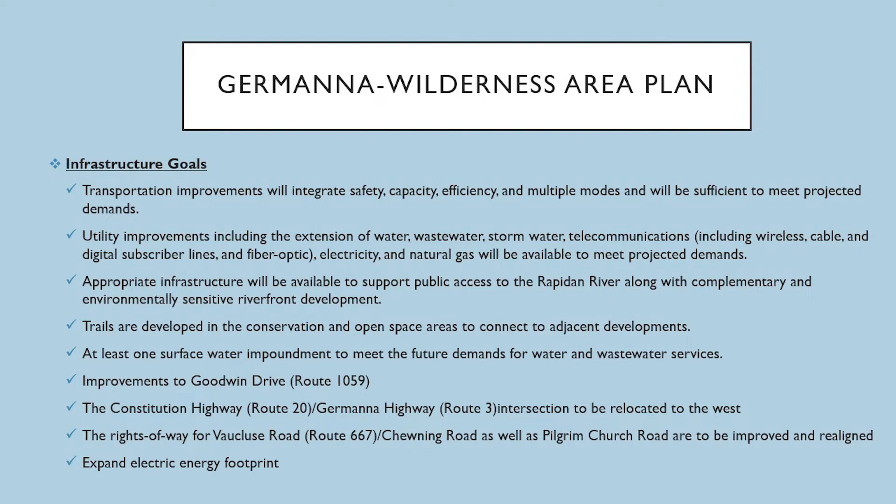So, as I noted, what's tied to the hip of the GWAP is your planned development mixed-use zoning district. Again, it incorporates a GWAP. It allows mixed use of interrelated and compatible commercial, institutional, residential, and recreational uses in a pedestrian-oriented neighborhood, providing a level of density and intensity in order to promote a dynamic and convenient neighborhood. Again, the town centers will be important to that.

But then you also have your traditional type of development with the larger estate lots and single-family units, and some townhouses, exemplifying the traditional communities that are pedestrian-oriented. You're going to see we're going to have access for pedestrians off-site to come on-site. We want you to come on-site, spend money, come into the town center, eat, and shop at our restaurants and retail stores. And then we're going to have bike mobility, and in the future we hope to have public transportation within the project as well.

We're also going to be incorporating, preserving and protecting natural sites and features. You'll see in our plan well over 1,100 acres of open space that we preserve. We'll be utilizing stormwater principles that preserve and protect runoff. We'll also provide for the efficient use of land, which preserves open space.

Area standards: under the PDM zoning district, you only need 20 minimum acres. We've got 2,618. The minimum area related to non-residential development - that commercial site and sort of your town center site - needs to be 10 to 30% of the gross project area. We will exceed that, you'll see. And the maximum gross residential density is 6 to 12 dwelling units per acre. As you know, we're well below that, 1.6 to 2.5 units per acre.

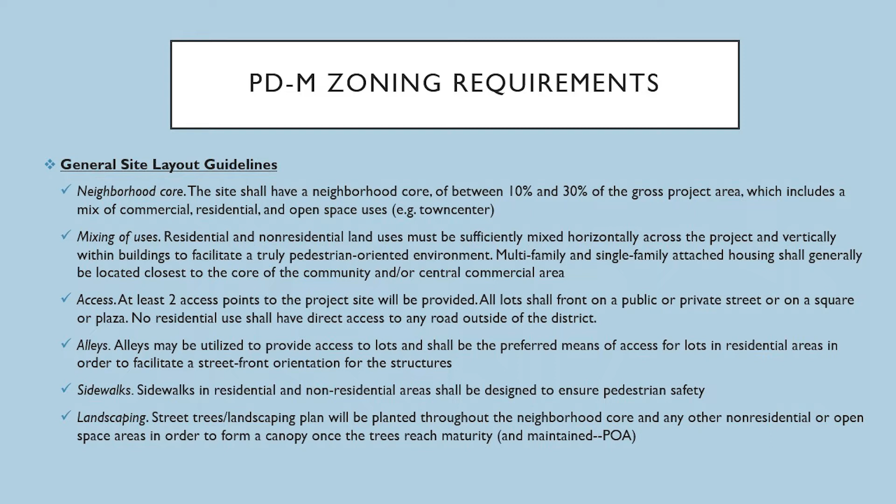And just on that last note on landscaping, there will be homeowner associations and property owner associations. They will be charged with maintaining the restrictive covenants, probably sort of like what you guys have in some of your developments, and maintaining landscaping and ensuring safety.

Proposed land uses - so here are the land uses that we're proposing, they'll be within the project. Residential, you'll have a full menu of single-family, 2-family units. You'll have townhomes, multi-family units, assisted living. One of the things we would like to encourage is age in place in this location, meaning you can start out having a single-family detached home, you can downsize to something smaller, and then when in need, you can utilize assisted living if you need it.

And then the commercial component would include office professional services, medical, office, veterinarian, all within the town center area. Commercial recreational uses, restaurants—we all want to go to restaurants. Every community I work in, everybody wants to go to restaurants. Financial services, everybody's got to have a bank close by. Retail and grocer, all of these anchoring their commercial components.

Hotels or short-term lodging, maybe bed and breakfast, would be attractive within the town center. Hospital and medical facilities, we'd love to have in the town center. We think with the type of synergy we can create here, you're going to attract medical investment. The town center itself—commercial retail, residential—will be attached to the office retail as part of the components. You'll have office professional services, medical office, restaurants, specialty retail.

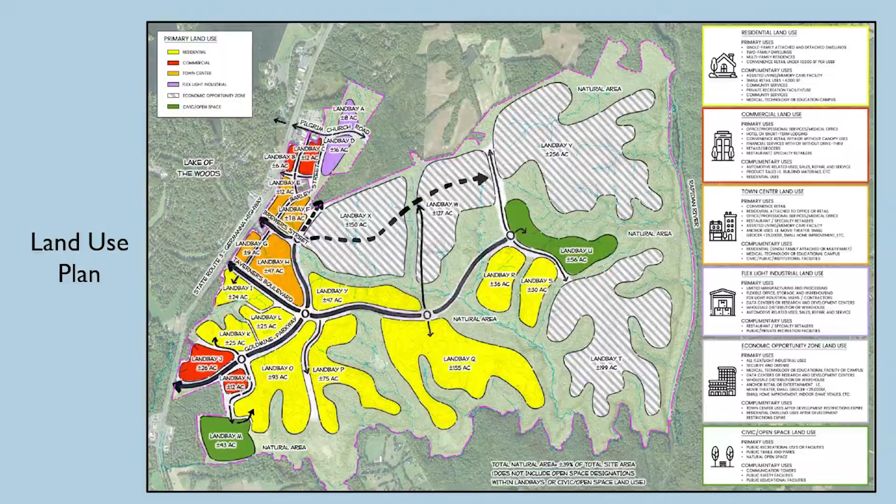Next slide, please. The first area we're isolating is our residential land bays. These are intended for the various range of homes that Charlie described in the land use, and the areas that this encompasses. The goal here is to really utilize the natural features of the site as well as the proximity to the town center.

I've spent a career now studying town center projects, and they work well when residential is incorporated around them and with them. When they're strictly commercial, they don't function that well. So a lot of thought went into this plan as it relates to commercial viability and some of the benefits that commercial folks look for from Route 3, in terms of traffic counts and existing conditions, but also the synergy that this project will bring with the addition of the homes being proposed here.

Next slide, please. So these other residential land uses—the primary uses are a lot of what Charlie mentioned with the attached and detached dwelling homes. But again, we're talking about the size and a broad range of homes: two-family, multi-family residences. There's a lot of appeal for a site like this for nice garden apartment complexes and urban apartment complexes—it could be a component of the town center.

Complementary uses include assisted living and memory care facilities, and small retail uses. When you get to a level of synergy with the size of some of these land bays, we don't want everybody coming out to Route 3 for everything they need. A lot of successful PUD projects sprinkle commercial space and services throughout the community so folks can get a cup of coffee or take their kid to daycare without having to come back and concentrate that traffic along Route 3. So that's a complementary use.

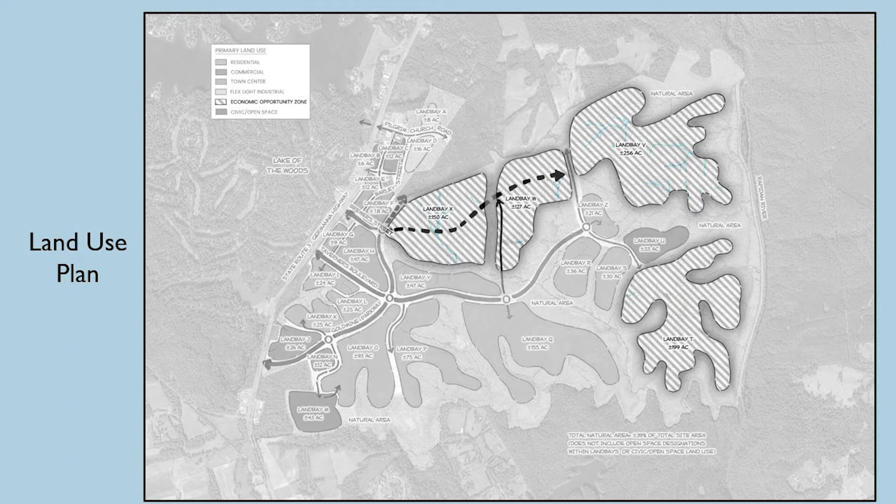And what some of those uses may be, those high-tech, flex, light industrial users, security and defense. This site, with a site of this size, a lot of times security and defense users are looking for land around them. They want to be isolated. They want to be away from people.

Medical technology campuses, data centers, R&D facilities, wholesale distribution and warehousing, again anchor retail, entertainment, grocers, all the commercial land uses, and then again the town center and the residential uses as the development restrictions expire. This is a lot of land to consider, and we've worked with the county to put a time frame on that for the economic development uses.

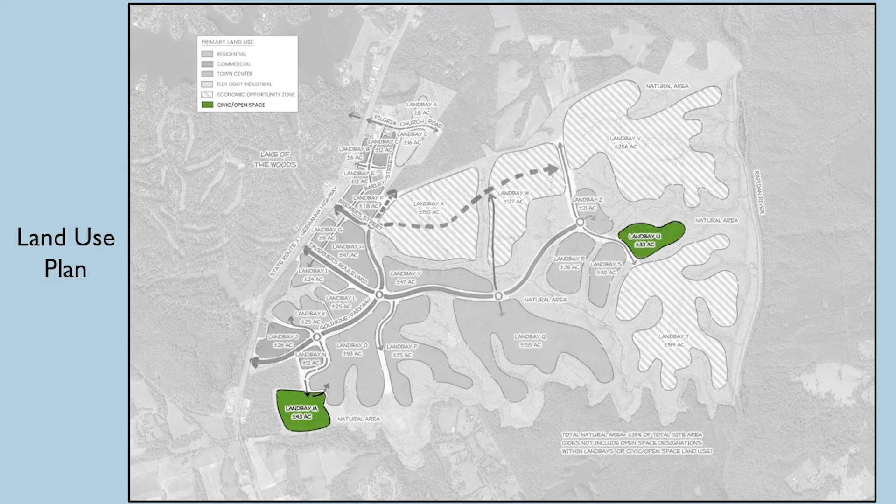And finally, the final land use is open space. We're wanting to do public parks for the county. There's a demand for public parks now. There'll be a future demand as this project hopefully moves forward to have public space for recreation fields, trails, parks, and whatnot.

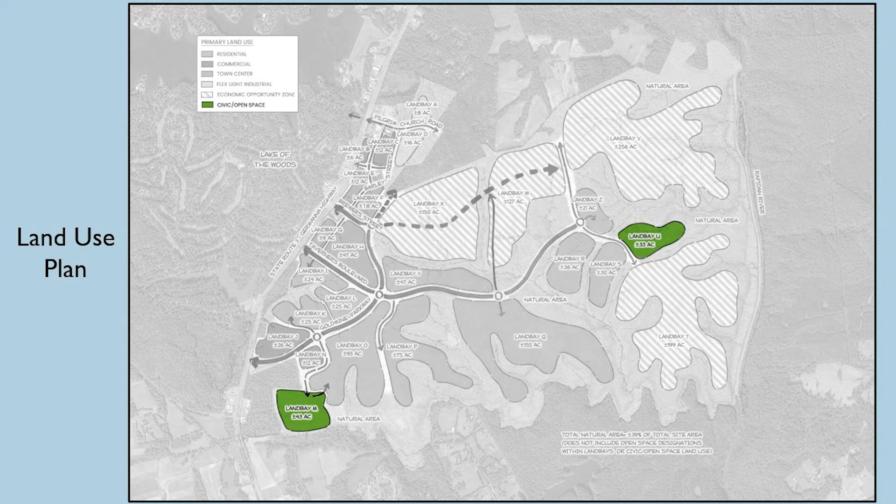So those could be public recreation centers, uses and facilities. It could be a rec center, it could be a senior center. It could be parks, ball fields, public trails and parks.

Throughout the natural area, and you see this in the transportation plans that we presented, there is a multitude of pedestrian connectivity, both on road, multi-use trails that we're used to seeing in communities like this, and in natural areas, inviting people to get into the natural space and enjoy it. So any public facilities would definitely be into that program.

And complementary uses, communication and public safety is key, both for the county's fire and EMS systems and police and the sheriff's office. So we want to make sure that those are potential in these green spaces, as well as education facilities, that there could be a public school or a vocational school available in those locations.

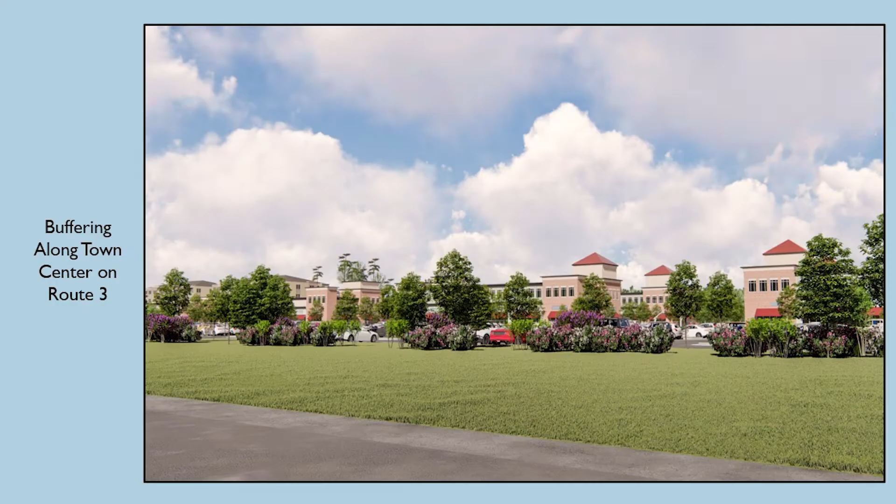So what does this look like? We've put a decent amount of time in kind of envisioning this. This is a concept. It's not necessarily what will happen, but it's also tough to envision what 2,800 acres or 2,600 acres looks like. So these are some graphics that we proposed.

This is the town center from Route 3. This would be kind of, if you were driving this today, this would just be to the east of the post office that you would see this vision here.

So this is the town center. It's an internal streetscape, with manicured landscape buffering from Route 3. A lot of our landscape standards speak to maintaining existing vegetation where it's safe and effective to do so. There are a lot of really nice old growth hardwood trees on the site, so as this project matures, the applicant will be studying that to make sure those are appropriately maintained, again where it's safe to do so.

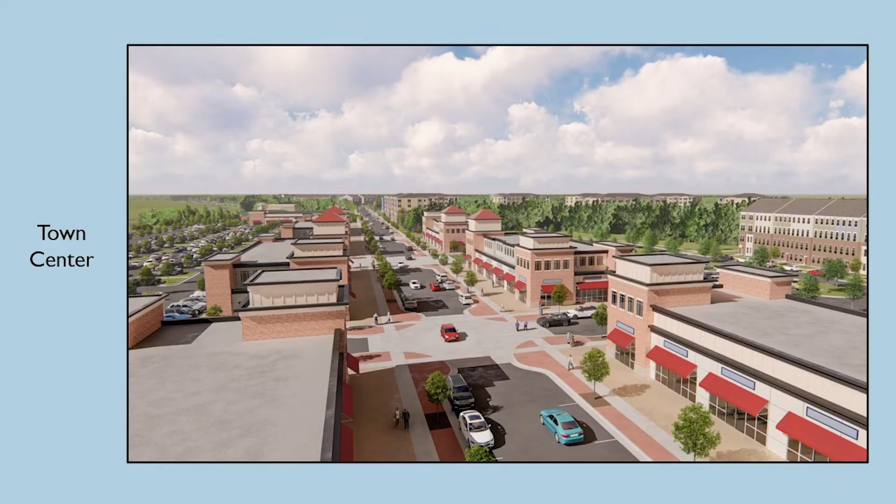Next slide, please. This is our streetscape, Bartley Street I think is what we call it, through the middle of the town center to get a sense of scale. This is your walkable town center with streetscapes, vendors and shops, retail out in the open space, outdoor dining, highly walkable. The goal is that you come, get your goods and services, park your car one time, or maybe you move across it by bike, or in the future use a golf cart to get over. But you come to this space and enjoy the time. We've also programmed entertainment uses like large amphitheater spaces in the town center as well.

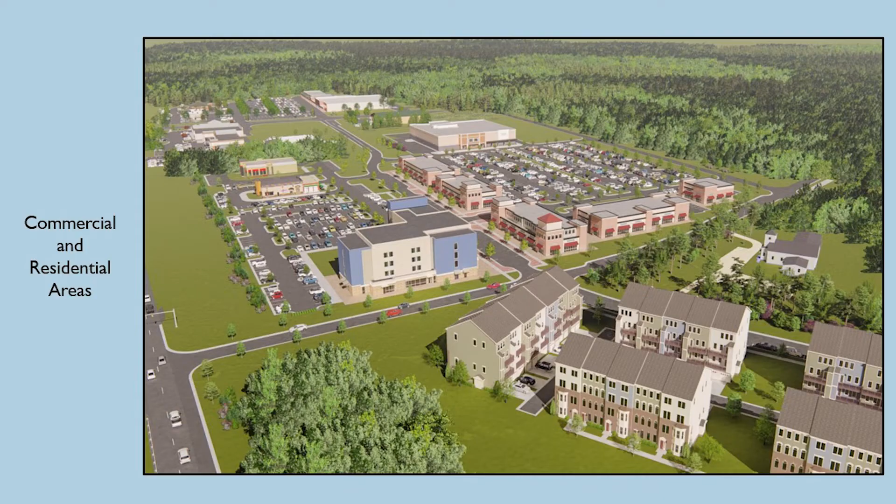Next slide, please. This is the commercial section, just beyond Gilbert Drive. The far building you see at the top of the slide is where we modeled the Food Lion. This is where you have more conventional commercial uses, like a flagged hotel, a Hampton Inn or Hilton Garden or something like that. But in keeping with the spirit of some of the goals of the GWAP, we've worked really hard to urbanize those, so instead of a large parking field in front of them, they'd be up on the street corner building that architectural frame, hiding the parking behind those buildings, to take the goals of the look, feel, streetscape and scale of this project as it relates. We've also shown some residential areas here, exhibiting our alley-loaded residential, which is also a goal of the small area plan.

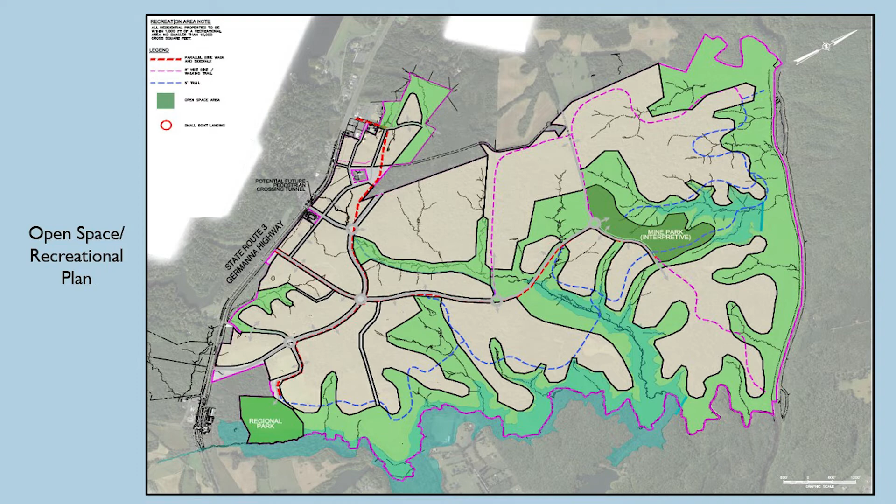Next, please. Here's the recreational ball fields that we'd be constructing. You'll see that it includes various different types of fields—soccer, field hockey, possibly football. We've also got tennis courts, pickleball courts, general meeting areas, etc. This will be built by the developer, dedicated to the county. Next one.

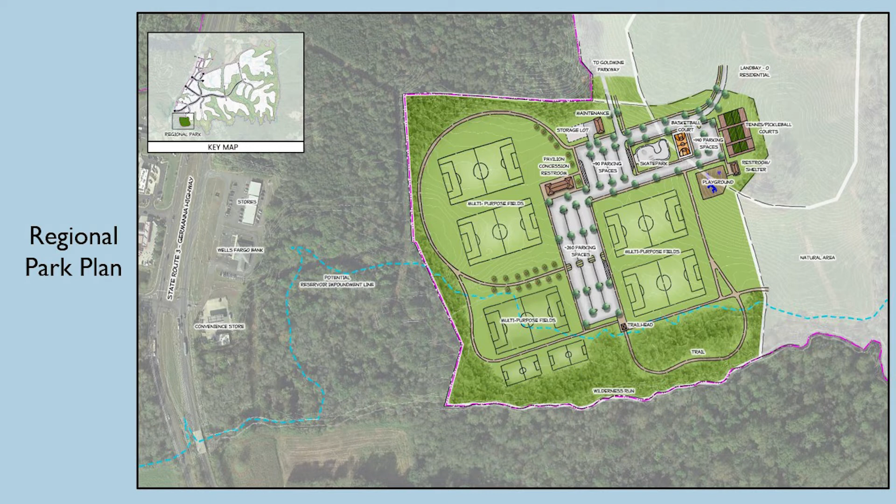Continuing with our proffer statement, again, these are just sort of key proffers—there's lots in the proffer statement. Phase 1 of our development will include the construction of Goldmine Parkway, an internal parkway into the project off of Route 3. We'll also be developing a mix of residential, commercial, industrial uses, and economic development focus during those first 10 years. Construction of proffered phase 1 transportation improvements—we'll get to those in just a little bit.

Extension and construction of RSA water and sewer utilities. Mine evaluation and mitigation—there's been discussion and some questions regarding the mines that are on the site, we'll get to that in just a little bit in these slides. That will be evaluated and mitigated before there's a shovel in the ground. Dedication of the regional park area, completion of park area improvements—we build those ball fields, etc., and dedicate those to the county. And then dedication of the school site and the public safety site. And then construction of applicable amenities, those mini parks that Zach was talking about, the trails, etc., that have clubhouses and pools that go with all the various residential developments.

Next, please. So for transportation, during phase 1, we will be providing the following improvements at these key intersections. So just a little background on the transportation component.

What you do for zoning projects is you put together a scoping plan. That scoping plan looks at various different intersections that our project would impact, and we study those intersections to determine whether or not the project would degrade the level of service at those intersections. We don't get to create what that scoping looks like. We make a proposal, but VDOT and the county approve the scoping. So we've been working extensively with VDOT and the county on what that scoping is, and evaluating what our mitigation plan will be.

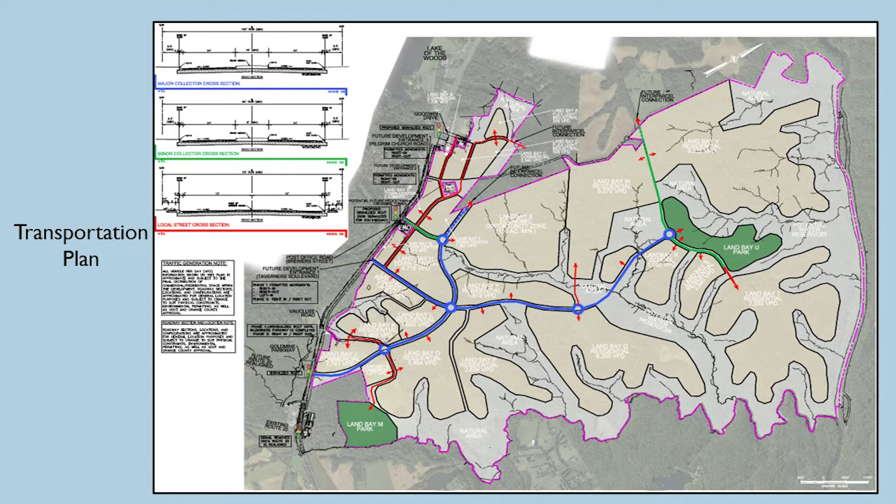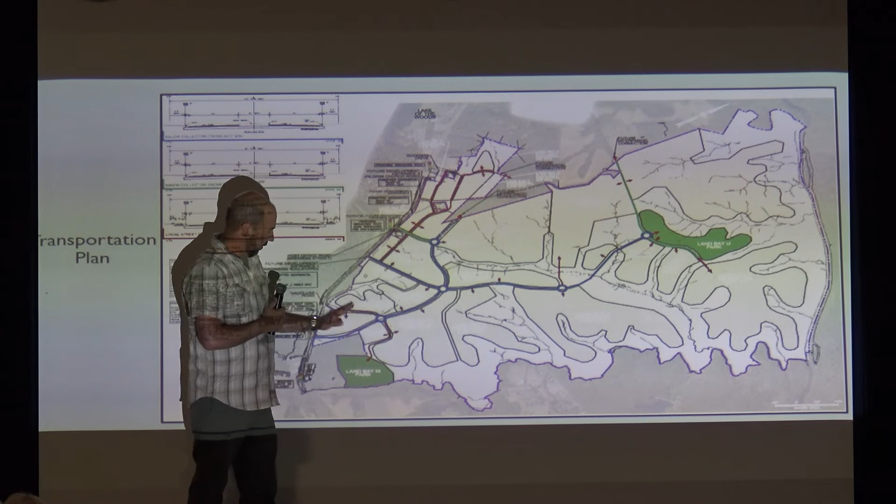So this is Route 3. Route 20 currently ties in about here, right? And the relocated Route 20 is anticipated to tie in here. That's not our plan - that's VDOT's plan, documented for several intersections along the Route 3 corridor. So we're aligning with VDOT's anticipated location relative to Route 3, and this is what we're calling Goldmine Parkway. It goes parallel to Route 3 and is intended to carry and serve the internal traffic off of Route 3. Essentially, once you turn into the development, you don't interact with Route 3 until you either want to go to Charlottesville or go to Fredericksburg and Richmond. That's the idea.

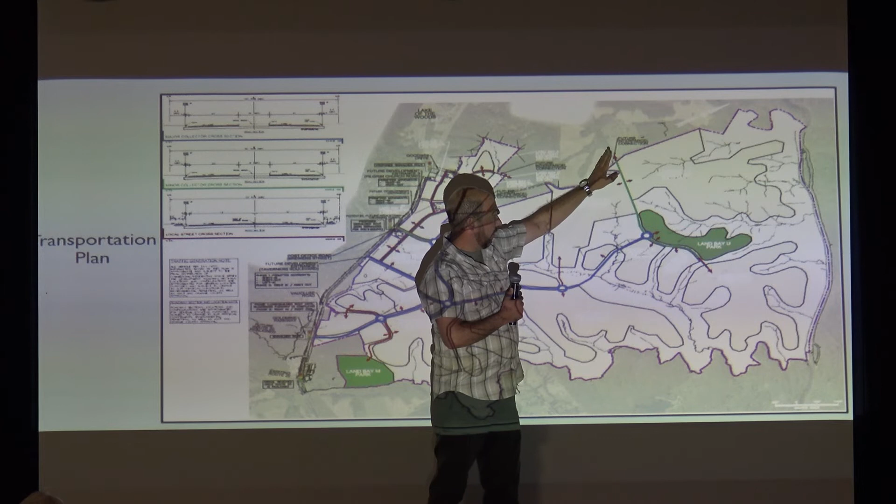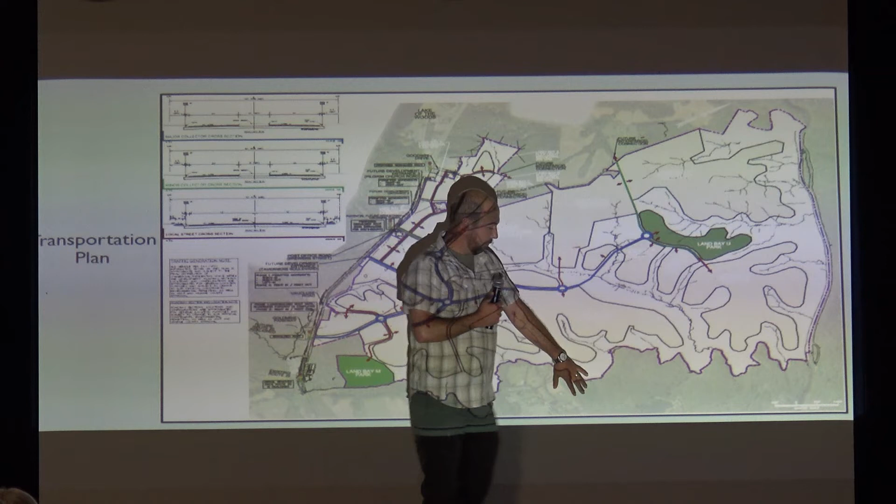So this is a 4-lane divided roadway with traffic circles and no signals. This is a similar 4-lane divided roadway that comes into the site and serves the different land bays and uses along the way, all the way to what we have right now as a park area. This would extend externally, could extend externally. We obviously can't connect to Spotsylvania County or across the Rapidan River, so we're limited there through environmental sensitivity, but to everywhere we can expand at points west, we certainly are.

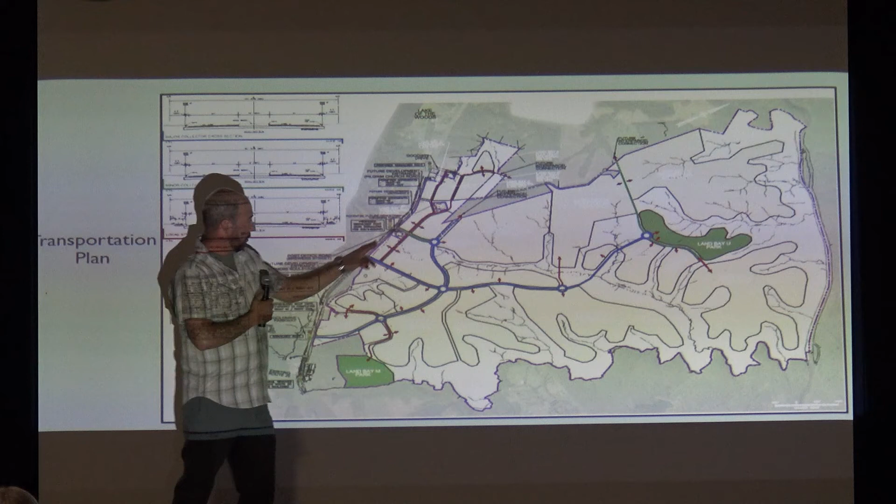Plunging off of Route 3, this is an R-cut signal in the future, and that's actually the only true new signal being proposed. All the rest are unsignalized. Sorry, the post office is right here - I apologize - and this is the Food Lion and everything right here. Okay, I apologize.

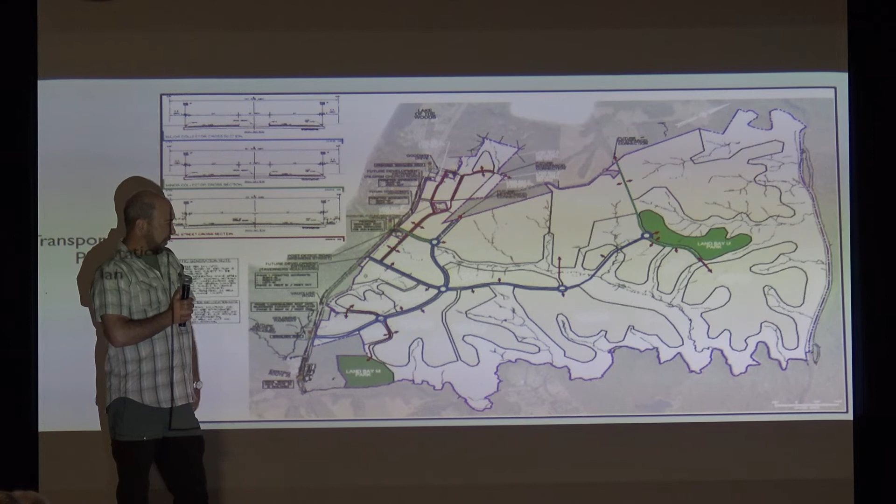Then in and through the town center are these maroon local streets that intend to carry very local traffic through the spine of the development. Obviously, there's going to be numerous other internal roadway networks that are impossible to predict right now, sensitive to the proposed uses on each site, whatever they may be. For example, we could easily come off this traffic circle and have a road that connects these two, but we're not sure how that's going to play out until you actually get a use there planning those roads. So that level of detail at this point is simply impossible.

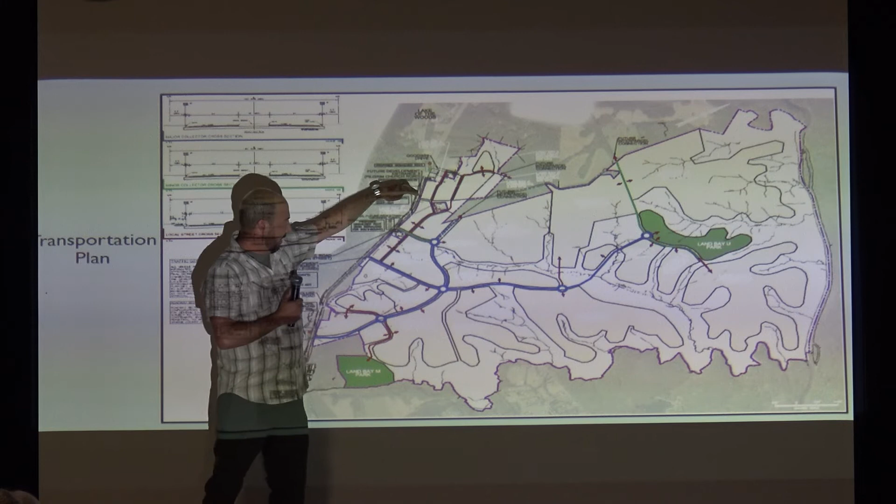We're going to answer more questions when we break up, and after this we'll be at different stations - it'll be easier to ask questions there. I just want to give a broad, impromptu overview - thank you. It's obviously quite extensive in a lot of detail, which was my point earlier, and we want to give you as much information as you desire. It's just very concentrated, so we'll break up and talk more about it.

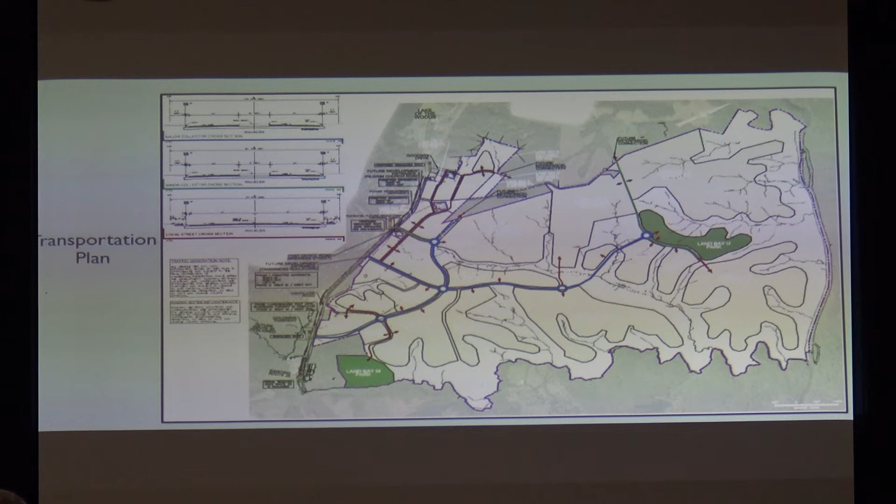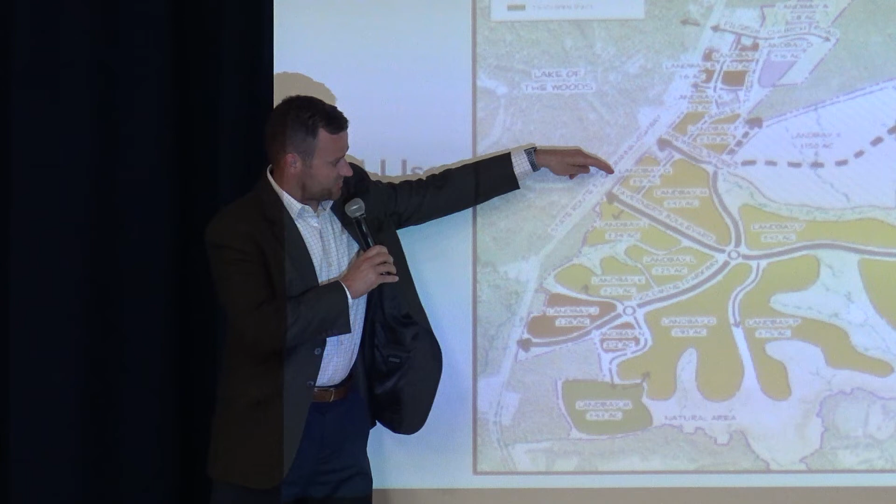So let me make sure I understand your question. You're asking about the extent of the town center, the commercial, what you see from Route 3? So if you're looking straight at the post office, which is on the north side of Route 3 - okay, I'll orient you. So this is the post office right here.

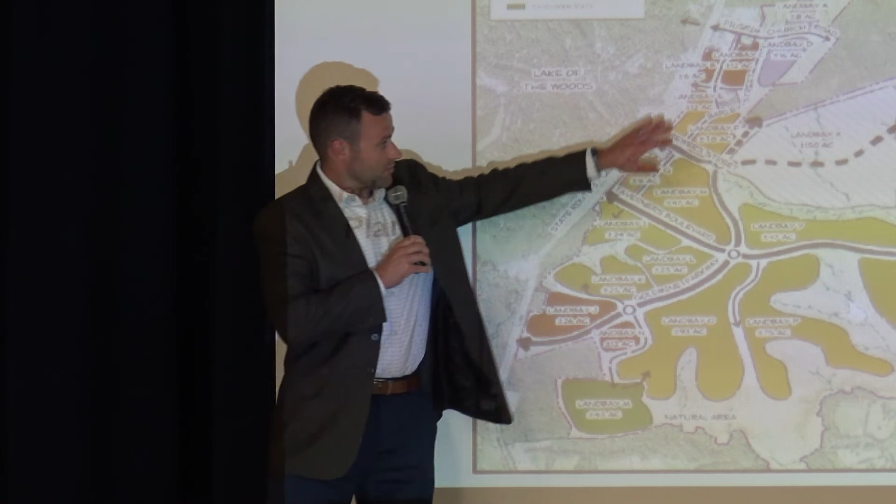So this frontage along here and then back to Germanna Highway, which is back in here, is the commercial frontage that's being proposed. Correct, but I thought I saw an apartment, or looked like an apartment building. Yeah, there's a hotel in one of the images, there's a hotel building, yes. Okay, it was shown right here on the corner by where the existing Pilgrim Church is.

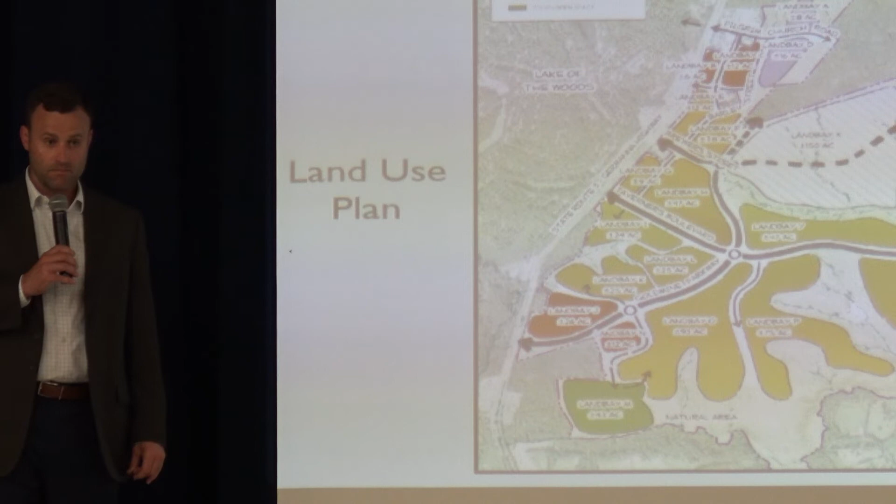But I guess my question is, you do not plan a high-rise apartment building right there on Route 3? There's a height restriction within the existing zoning, and we're working with the county's planning office currently to identify height restrictions throughout the project. Okay, thank you.

Yes, sir. Back to this end. Yes, sir, what consideration? I'm sorry. I'll come back, I have one simple question.

You have a ton of people coming out of your complex on the blue roads. Did VDOT address what they're going to do with Route 3? It's only 2 lanes, and you're going to put how many cars on the road in the morning going towards Fredericksburg or Culpeper? Did they address that? We have been working extensively with VDOT, and they have reviewed our transportation impact analysis, and they are comfortable with what we're planning to mitigate and offset any impacts from our project.

Yes, sir. All this money that we're trying to draw and spend in Orange County, that's going to mean traffic. I commute to DC every day, my commute is 3 hours, so I'm worried it's going to get worse. Well, if you think I'm suggesting there will be traffic, there will be traffic.

Our traffic study shows there'll be traffic, and that we have to mitigate it. There are obviously improvements at entrances into our site, improvements that we're making in Route 3, and improvements that we're making in all those intersections that I named earlier - a litany of them, 10 plus. So yes, we're making improvements to offset our impact. And again, this is not something we do in a vacuum. This is something we must do in conjunction with the county.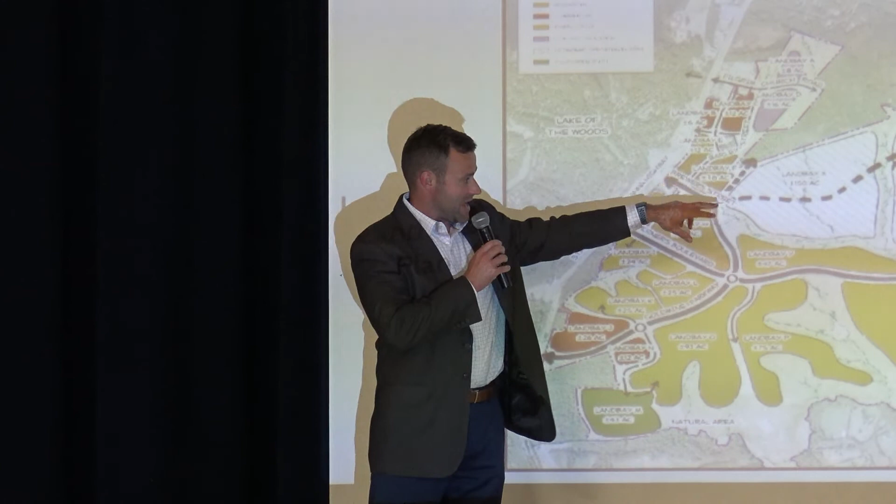That property goes—the orientation of this plan is north. So north is that way, towards the windows. So it goes north along the property line to the Rapidan River. So these 4 blocks, and I invite you to look at the boards before you leave, that are cross-hatched are 732 acres. It wraps up around the western property line, comes up to the Rapidan River and back. As you're examining these plans, the green spaces with the blue lines are some pretty deep ravines. I've been studying this property a long time, and we're not getting into those areas.

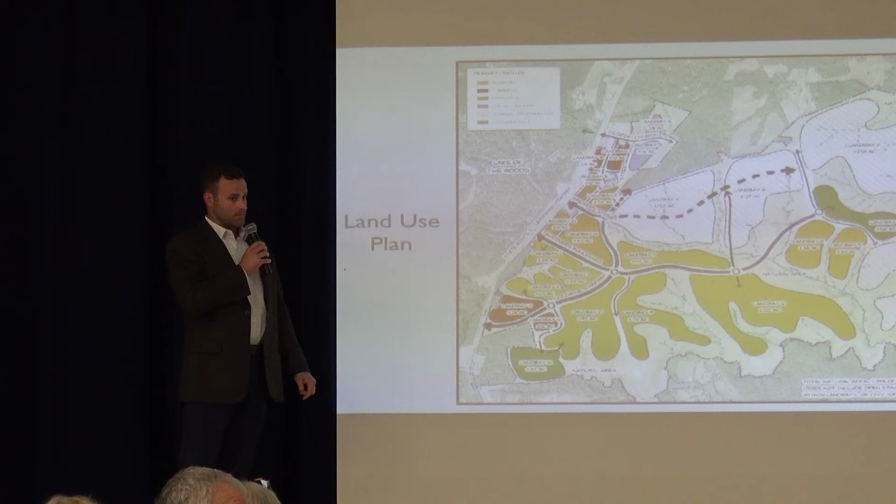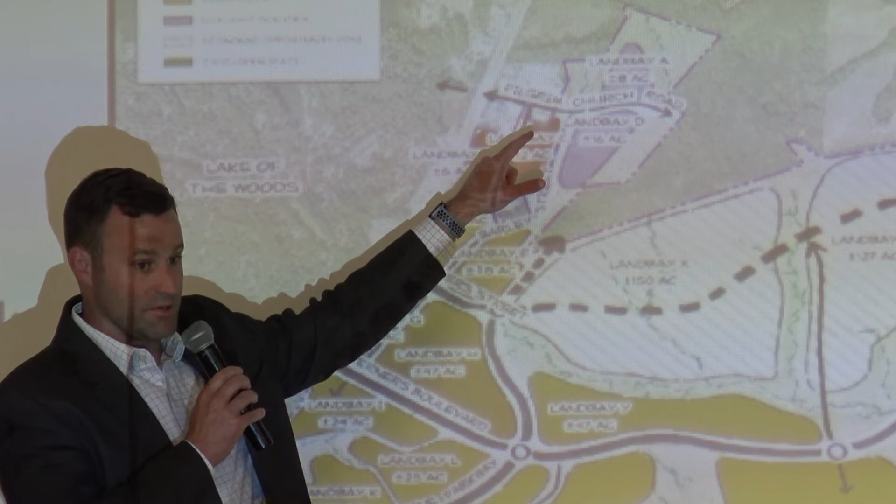But actually west, I'm talking about going west towards Culpeper. Where is the cutoff for this project? Is it going to be before you get to Walmart? Yes, so it's going to be back by—this is Food Lion right here. So we're just up behind Food Lion, probably 1,000 feet west of there, but we don't control that property. So if you were at the Food Lion, you drove up, go and drive to where it ends—that's this narrow part of the property here. It doesn't go out to Walmart, or several thousand feet away from that.